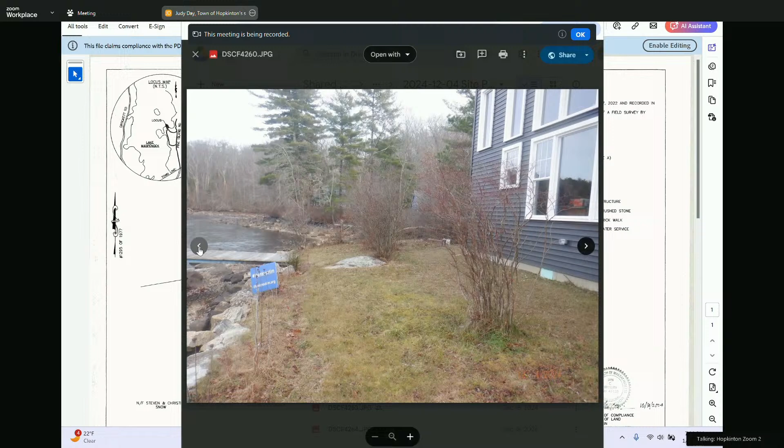Okay, no major concerns. So in your opinion, the additional plantings would likely be what the commission has approved in the past for tree replacement? Yeah, I didn't count the number of plants, but there's probably at least 10 shrubs. Okay, yeah, okay.

Does anyone on the commission have any questions or comments on this? It seems straightforward to me, looks pretty stable here. Anyone from the public have any questions or comments on this application?

Melissa: I was slow to unmute myself. I just have a question for you and Matt, I think. Are you worried about the roof runoff and drains around the house? I think, Joe, were you saying that you saw roof drains? I did not see roof drains.

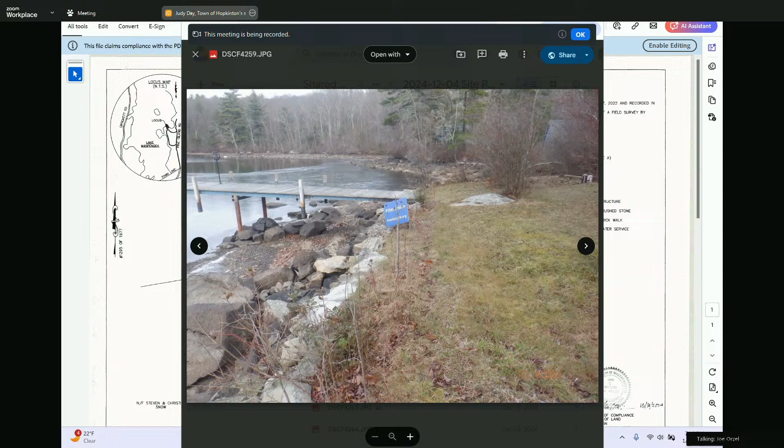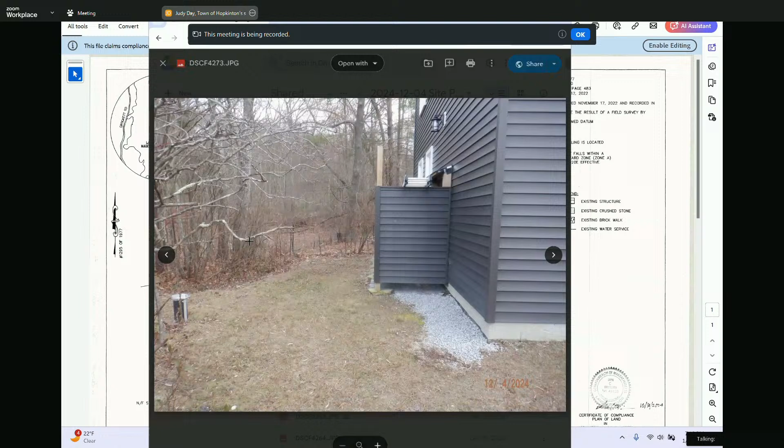So I don't know what was put in as far as foundation drain. I think the condition noted foundation drains were to be installed and perforated beyond a certain distance from the house. So there's no way of knowing that, but it wasn't observed during construction. But the crushed stone around the drip line kind of indicates there may be drainage under that crushed stone to pick up the runoff from the roof.

And there's no, do you have any gutters? No downspouts, there's no downspouts, no gutters. Okay. I think my thought would be that the crushed stone around the edge, with it just running off the roof and having time to infiltrate there, would be okay in my opinion.

Okay, and I guess the other thing would be the couple of items noted on the engineer statement regarding a few things done that were not on the approved plan. The shower you're looking at, that existing shower, was not on the approved plan. The crushed stone apron we're just talking about, stepping stone walkway, a landing, and another step in the walkway along the house. I think they're all within the limit of work of the proposed project.

Okay. I think I'm okay with this one. Okay.

If there's no other comments, can I get a motion to close out and approve this certificate of compliance and get signatures from Anna or Judy? So moved, second. All right, all in favor: Ed, aye. Jim, aye. Ted, aye. Matt, aye. And I am also an aye. All right, that's all set.

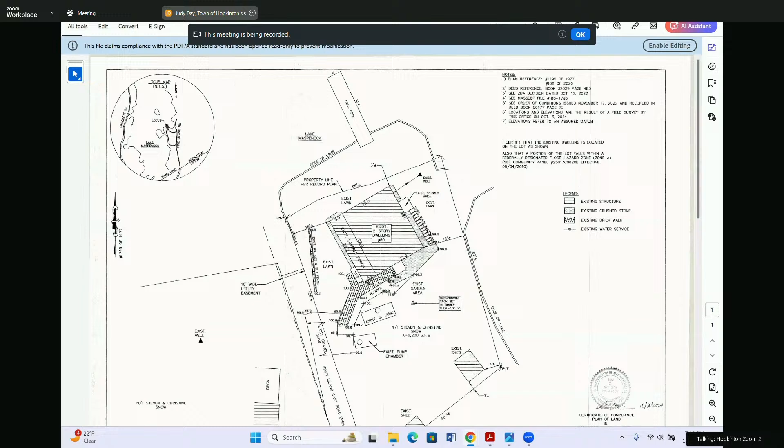All right, so what are we at? 7:12. If we have those on the line for the townwide vegetation management plan, I think we could probably go to that new hearing. And this is one I need to read. Grab my page.

All right. Hopkinton Conservation Commission will hold a public hearing on Tuesday, January 7th, 2025 at 7 p.m. virtually online to hear all persons interested in a request for determination of applicability filed by Hopkinton DPW for a vegetation management plan. Location is townwide easements and right-of-ways.

Do we have someone on the call? Carrie, I see Carrie. Yep. So I'm here with Carrie Reed, Director of Public Works, and I have with me Stephanie. Hi, Stephanie Hansen with CEI. So I'm just going to do a quick intro, and then I'm going to turn it over to Stephanie to go over the technical piece of it.

So this is for a vegetative management plan for right-of-ways in town. And the biggest question we've been getting is why, why do we need this? The Department of Public Works is responsible for maintaining all the roads, sidewalks, bike lanes. This will help us improve and give us another tool for maintaining those areas, for safety, for aesthetics, for operations and maintenance, and all that we're required to do. And then the other question is, why now? We've never had this before. Why do we need it now?

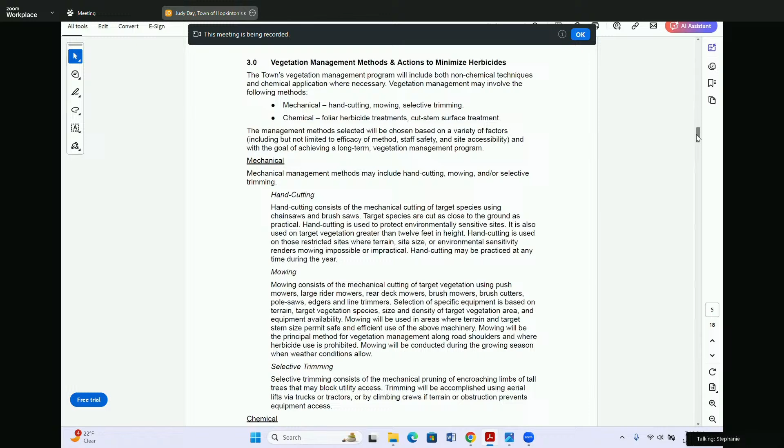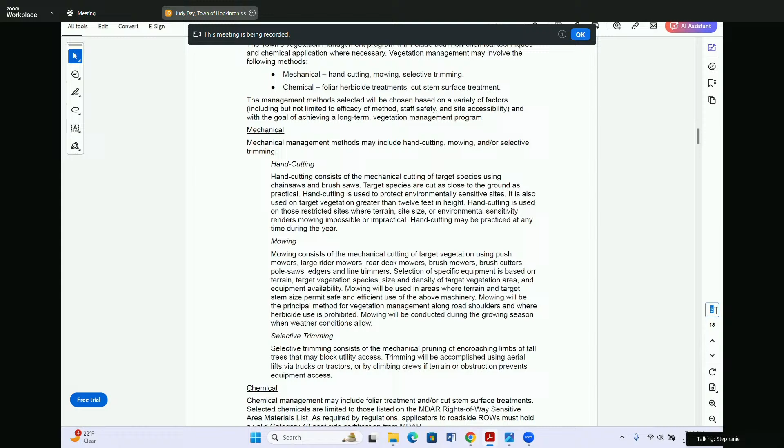The plans also provide guidelines for weather conditions during application. There's a remedial plan in there to address any type of spill. There's a monitoring plan and a daily log. And it also gets into applicator qualifications.

So for example, whether the applicator is town staff or a contractor, they need to pass a core license exam through MDAR. They need to work for several years under that core license, and then they need to pass an additional exam, which is their Category 40 right-of-way exam. And that allows them to then oversee any type of herbicide application.

This right-of-way program limits herbicides allowed regardless of labeled use. I know the town has a number of schools and daycares with IPM programs that have been approved by MDAR. This is a completely separate program. I'm actually not that familiar with it, although I did look through a couple of the plans for the schools, and the herbicides that I saw listed on there are actually not allowed for use within right-of-ways by MDAR. MDAR has a very small list of herbicides that are allowed to be used in the right-of-way.

Currently, both the VMP and the YOP are within a 45-day public comment period. Written comments for the VMP are due by January 24th, and written comments for the YOP are due on February 7th. Both of these have been published in the statewide environmental monitor, and that starts the 45-day comment period.

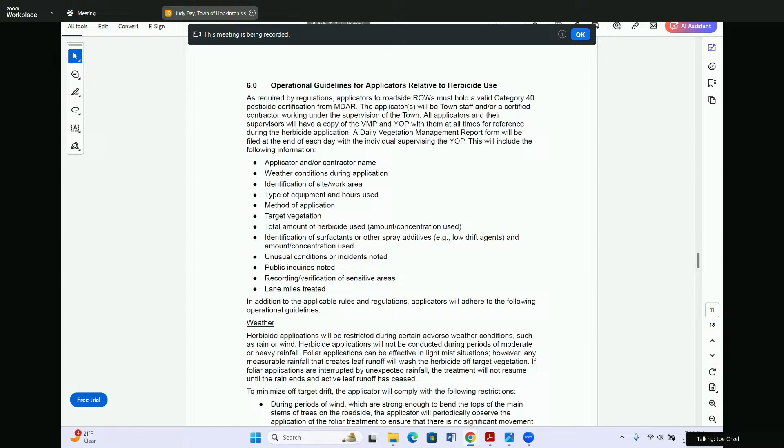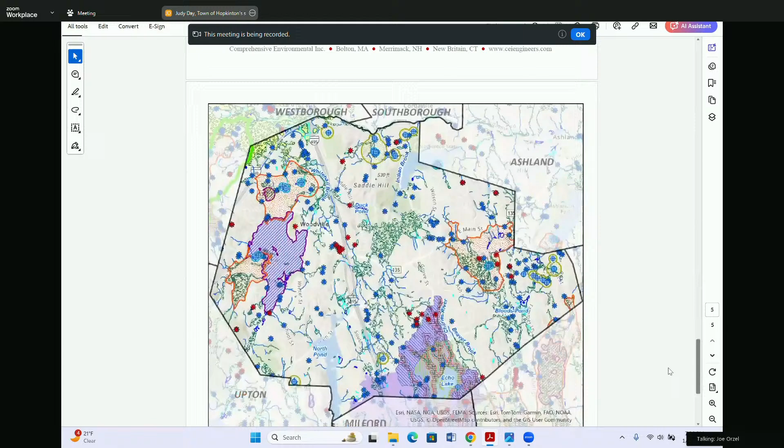I did have a couple of comments. I think I did have a chance to review the responses today, and I think the comments were pretty well addressed. I had pointed out just on the map that was provided, I thought there were a few things that were missing that should have been added, and those included potential vernal pools, the outstanding resource water data layer from Mass GIS, and also it looked like some of the DEP mapped wetlands were not on the original map.

And it looks like all those items have been added to the map, just to make it a little clearer where potential resource areas or potential sensitive areas may be in an area that they're going to be proposing to work.

I also just noted that the Wetlands Protection Act exemption referenced in the application is for work in buffer zones. If any work was proposed in a resource area, that exemption would not apply, but there is another exemption in the WPA for this type of work within the resource area, only if it meets certain conditions.

I would imagine if that was the case, they would come before the commission to get that clarified. As was noted, the vegetation management plan is now being reviewed, I think it's in the hands of the Department of Agricultural Resources, and I believe the only thing needed for the WPA regulation is a determination of applicability from the Conservation Commission.

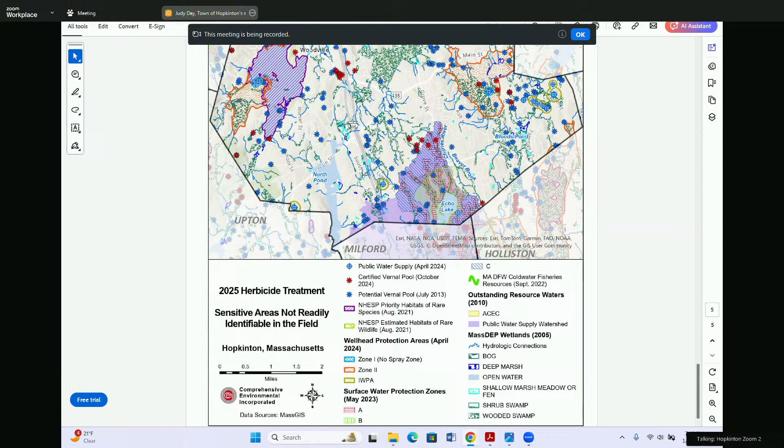There we go. Thank you. All right. And we have, really quick, Judy, 9 Chamberlain continued, but I should still open it and read it, correct? Kill it? Right, yes please. Make it go away.

The Hopkinton Conservation Commission will hold a public hearing on Tuesday, January 7th, 2025 at 7 p.m. virtually online to hear all persons interested in a notice of intent filed by Alex and Lilia Flores to construct an addition and an in-ground pool with associated site work. Location 9 Chamberlain Street, Assessor's Map U23, Block 11, Lot 0, and 0 Chamberlain Street, Assessor's Map U23, Block 12, Lot 0.

Can I get a motion to continue this to the next hearing, January 28th? So moved. Second. All in favor? Ed, aye. Jim, aye. Ted, aye. Matt, aye. And I am also an aye.

Moving along to Heritage Properties, the trails at Legacy Farms, request for additional units to be released from the cease and desist. This is a continuation. So do we have Mr. Bemis, Mr. Gately on the call? I believe so. Yeah, I'm here, and Mr. Gately, I believe, was going to attend. Okay, oh yeah, I see him. Here I am.

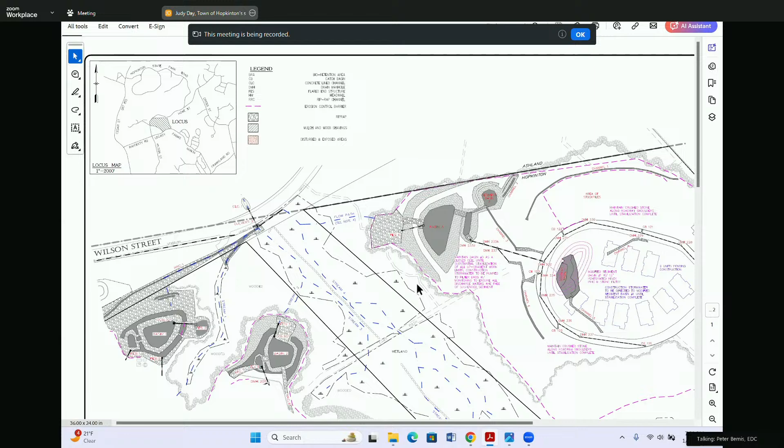The 11th unit would actually be in the basin, so that wouldn't be constructed. That's unit 43, until all the other work was done. This is in the center island, if you will, of Waterville Lane. So we showed the units where they're positioned, and then the basin. That basin's been constructed. I did provide a picture of it. There's no channels leading into it yet because nothing's started until you approve it. But we would bring a stone channel into the basin for the units. I would suspect I'd have one on the east side and one on the west side, probably for the units.

Just to bring water down from the construction limits to the basin. We were going to perforate. We did put a riser pipe in. We were going to perforate that and put stone around it. We actually have already put this basin into effect. We had a rainstorm which had pretty good volume, and the basin infiltrated within that zone. So we're going to leave it and monitor it and see how it goes. I'd rather infiltrate as much water as I can here versus having it run off.

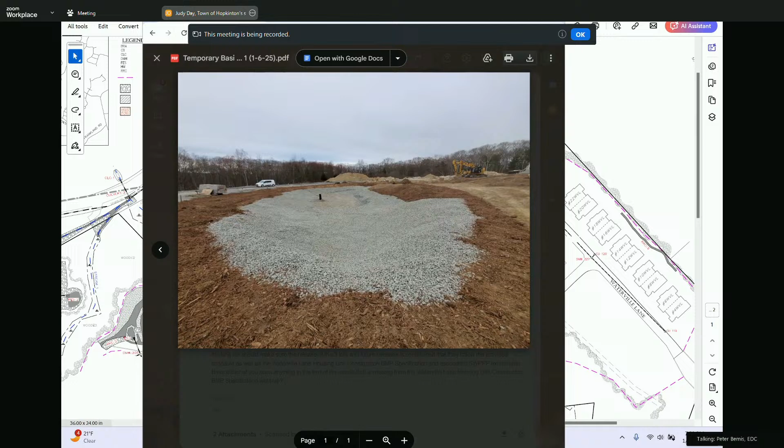That pipe would overflow its top if it was to be an excessive storm, so we do have the ability to manage this if we get a real heavy storm. But I have to say the capacity of that basin is pretty large, much larger than the water that should be generated in this island of land that we're now going to disturb. So we're trying to put things in the right direction here, and this is all stabilized within the basin limits.

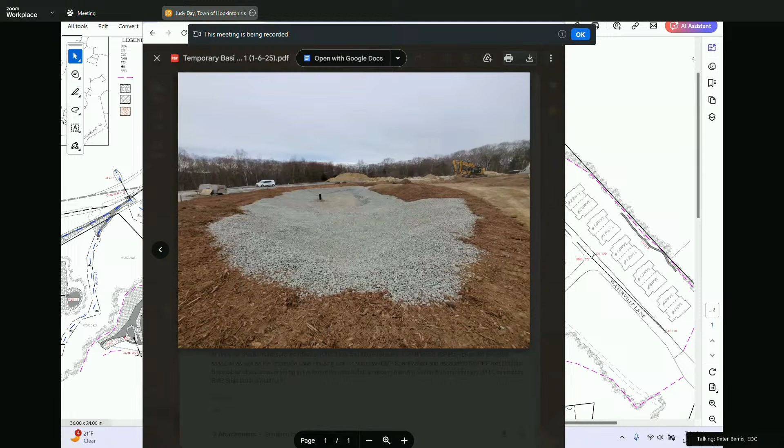And the last thing that we provided you with was a construction schedule that was updated to outline the 3 units we're asking you for this evening. We would anticipate a construction start on those in the next 3 weeks. And then we would be finishing our sewer pump station, that's probably about a week and a half out. We've got some gas mains going in, also about a week and a half out. And then we would be back to you in mid-February for the next release, if we can get those 3 foundations underway as we expect.

Okay, that's all within the same island. And then there'll be a future request sometime in April for 4 more units. And by April, we would expect to have the ability to start stabilizing some of these areas permanently.

Thank you for providing that detail. And I believe you got all the SWPPP reports in. You said that in that last rainstorm there weren't any silty discharges coming from the site. Correct, looked good. Basin 3 is shut off again - like I said, we should have done that for that previous storm, but it wasn't done, so it is now.

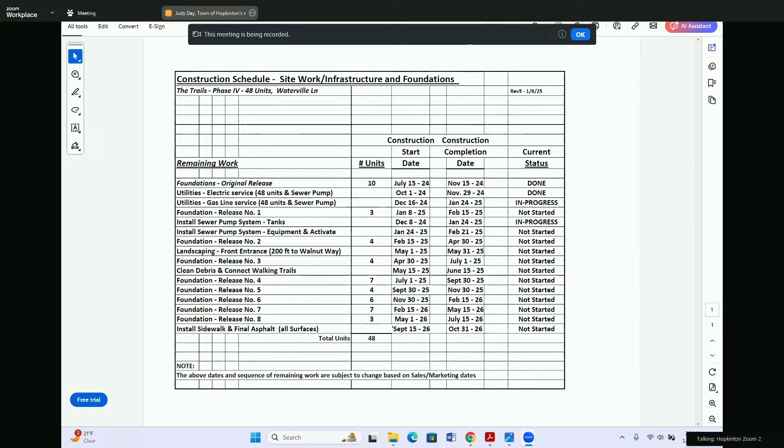Judy, can you just put up the BMP sequence schedule? What are we calling this, construction specification? So I was reading through this, and I think this construction specification and the level of detail here is really great, and is kind of what I was thinking of as far as scheduling and making sure these things were in place when foundations were done - putting down stump grindings and stone and things like this.

So I think at this point in time, speaking for myself, I'm comfortable with releasing the next 3 lots, including the schedule. But in my mind, the schedule incorporates this BMP specification. Those 2 documents kind of work together and live together as far as sequencing and scheduling of how these lots are constructed and brought online before you go to a next phase.

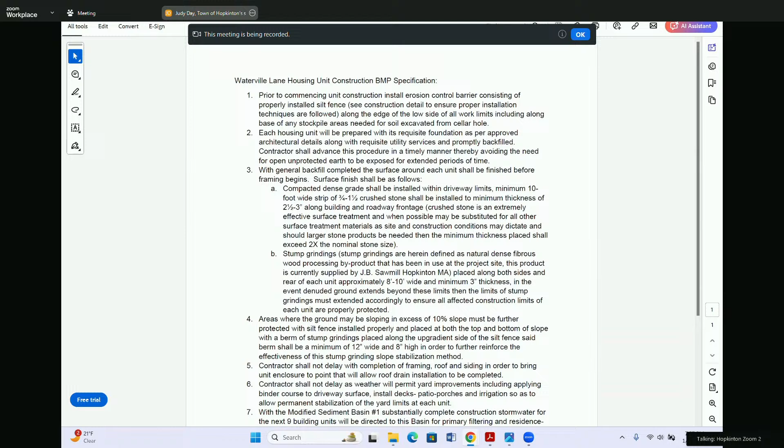My thought would be we could release these lots on the condition that the schedule is followed, including these construction BMP specifications as part of that scheduling sequence. Does anyone on the commission have anything they want to add or comment on here?

I can speak to that. We had a hearing back December 23rd, roughly a week or so after the last hearing with this board. And at that meeting on the 23rd of December, they did release these same 3 units we're talking about here, and of course their approval was conditioned on getting the same approval by this commission tonight.

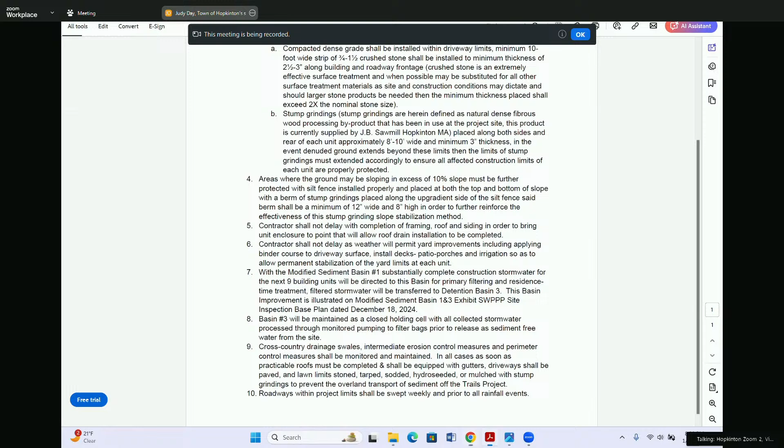All right, next up we have Toll Brothers, Elmwood Farms 3, Newberry Glen violation discussion. Hannah and Judy, do you want to give some background on this one? Sure.

So Hannah and I, on December 30th, observed sediment beyond the limit of work originating from the Elmwood Farms 3 development. We observed the sediment in the 2 off-site stormwater basins on Blueberry. And then walking up onto the development, saw sediment-laden water pooling around one of the catch basins towards the middle of Fitch. Let me see if I can pull my pictures up. So the basins were silted out.

The contractors had placed a sort of temporary barrier at the outlet of the first basin to try to limit some of that water flowing out. But since the hole where the pipe is in the outlet has gaps around it, it doesn't work super well, so water's still kind of flowing freely through there. This is the flooded area around the catch basin. There is a silt sack, but I think the silt is so fine that it's going through there.

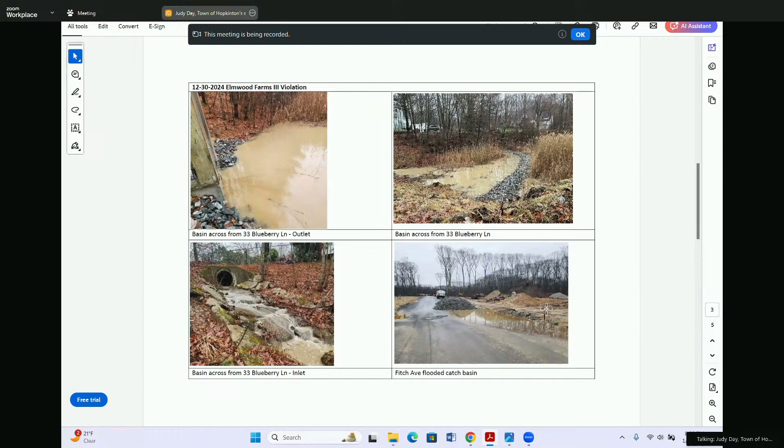We did meet Rich on the site, and they had a lot of the same thoughts on this pooling causing the downstream sedimentation. So they've since added wattle and silt fence 100 feet in both directions of this catch basin. We went out a couple days later after the New Year's Eve rain and didn't see any of this pooling. The basins were still super silty, but the water coming into them was clear at that point.

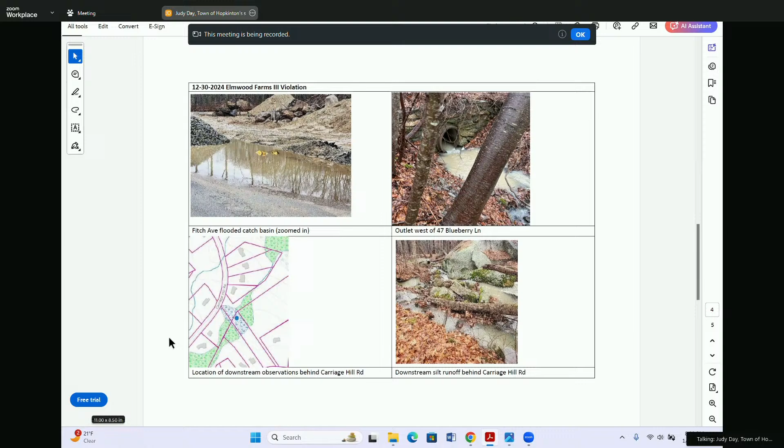But we did walk about a mile downstream and observed sediment beyond what we would consider the stormwater system, past the basins, all the way back through under Ash Street and then behind Carriage Hill Road for about a mile. All still silty through last Thursday.

I believe Rich and Ted were planning some other mitigation besides the wattle and the silt fence. I think they added floc logs to some of the catch basins and are considering a temp basin as well, but I believe they're on the call if they want to speak to some of those additional improvements.

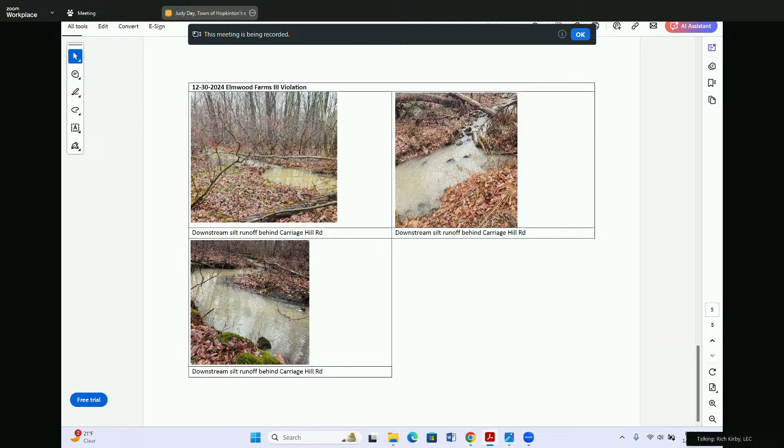Thanks, Judy. Rich Kirby from LEC here, and of course, Ted Merchant's on the line. If I could share my screen, I could overview with the commission the materials that we had provided to you.

I was on the site the morning of the 30th when Judy and Abby showed up, and I was on the phone with Ted talking about how we can better address the runoff. If the commission recalls, we had installed silt fence and compost socks along the edge of the pavement here, increased the diversion swale, and did some other things as a result of the prior rain where we had about 2 inches of rain.

This is about a 1-inch storm. And we thought we had it covered, but there's a slight low point in the pavement here with these two catch basins where water was ponding. So later that day, I put together a correction plan, and it was implemented later that day and on December 31st.

And this is the results of what we had done. So basically we added floc logs to the catch basins in this area here. We installed the compost sock and silt fence along the pavement edge and cleaned up the sediment on the pavement, to capture any runoff coming off the hillside in this area.

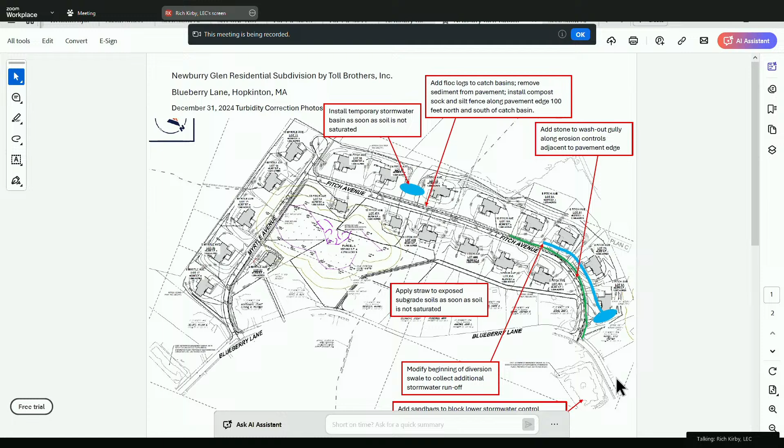So some photographs to show you what that means. Here's where the pavement was cleaned up. For reference, you can see the pile of stone near the pavement right there. This is where the water was coming off the hillside and entering into the pavement and ponding in this low spot, where there's a catch basin here and another one across the street.

The silt fence and compost socks were installed as the street rounds to the north and intercept Blueberry Lane. Stone check dams were installed intermittently to again slow the water and try to capture some sediment.

And this is the off-site basin on the 31st, and they blocked off this orifice with sandbags and plywood, so the water level could rise up and it could contain and retain more stormwater on the site. You can see the stormwater cleared out pretty quickly after the rain stopped.

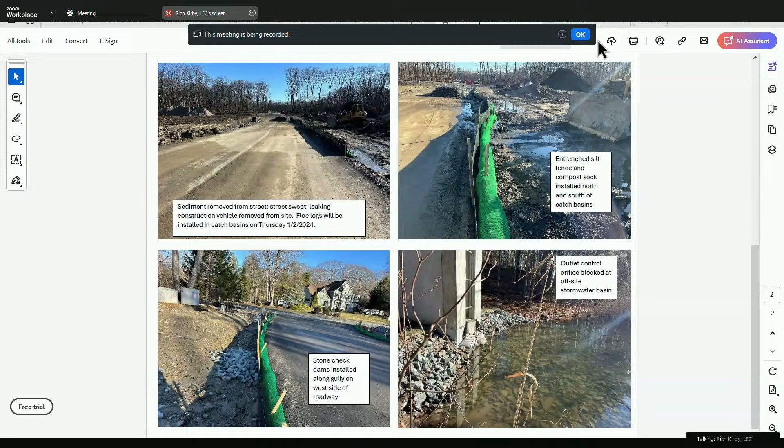Can everybody see the plan now? This is the plan that's put together showing areas where seed, straw, tackifier, and flocculant were added. The green areas are indicative of areas that have been completed. The yellow areas are scheduled.

Hydroseeding is sort of a balancing act between having frozen ground conditions where the equipment can drive over the land to access these areas to spray, but it being warm enough so that they can actually spray it and that the water doesn't freeze so they're able to actually implement it.

So far, the slope over by the stormwater basin, the offsite stormwater basin, has been sprayed and stabilized. These two lots have been sprayed and stabilized along with the roadway shoulder. These two lots are under construction or will be excavated next week. So we've got the roadway edge here and this area adjacent to the loam pile. This is where the two catch basins are.

And then the opposite end, the southern end, you can see what we were able to spray along the roadway edge here, and then more will be provided in this area.

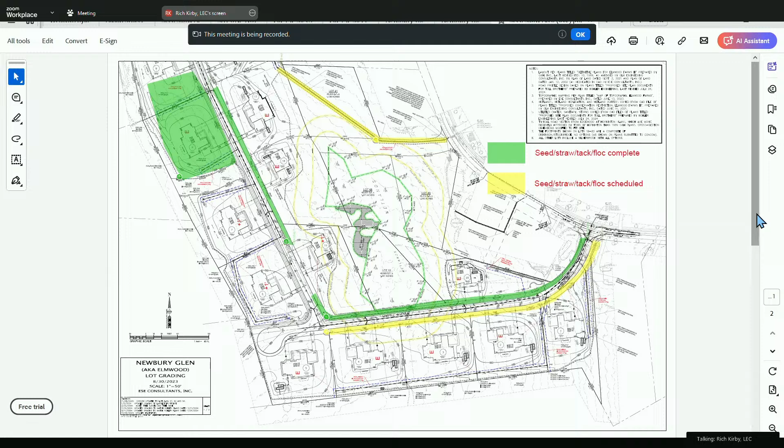So that'll give an opportunity for us to further stabilize the site. And of course, the plan going forward is as additional lots are opened up and the topsoil is stripped and stockpiled, those would also be sprayed with the same mixture of seed, straw, tackifier, and flocculant. So we are more confident now with this plan and the things we've implemented thus far, based on what we saw after the roughly 1 inch of rain that prompted the violation.

And if I can just chime in, I'd like to say that we realize the evidence and some of the pictures that Judy showed are not acceptable, and we're committed to correcting those issues. We'll work as much as we need to get it complete. We realize that's not what the town wants to see, certainly not what we want to see, and we'll work until we get it right.

Okay. Thank you. Appreciate that and share that sentiment for sure. Appreciate the efforts. I know that...

So there were two rain events. One caused the pictures that were shown, I believe, and then there was another day of rain, maybe after you had installed some of these measures, and I think it did improve. There was still sediment making its way downstream, but as Judy had said, coming off the site it was cleaner, or it was clean. So I appreciate and thank you for taking care of that, because it seems like you did, as evidence of that second rain event, take care of what was coming off of your site. So I think that's very appreciated and positive.

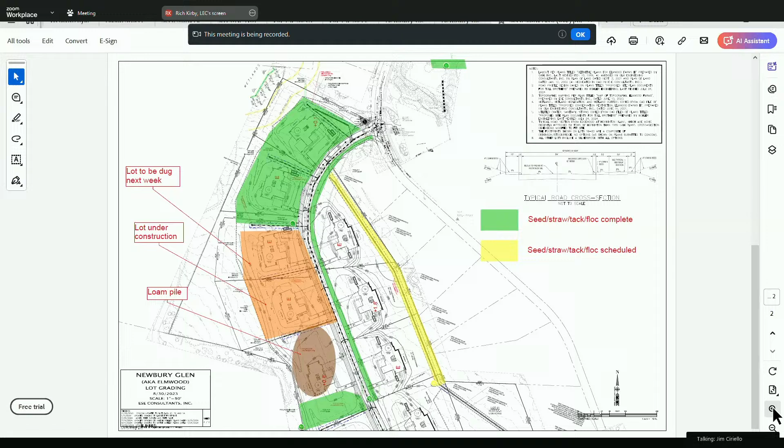And not stabilized in any other way. And then also, I can't really see on the plan that I'm looking at, but can you give me what's the elevation difference between the top of foundation and the existing grade, roughly? Oh boy, I'm not sure that information's on this plan, but we can look. Oh yeah, actually it is. I mean, we're talking a foot, or we're talking 10 feet? Well, there's only one foundation in the ground, and that foundation hasn't been backfilled yet. So, in a finished condition, that's maybe a foot or a 2 foot difference.

I guess what I'm thinking about is that excavation of that parcel without knowing how things are going to take place in a significant storm event. The houses on the right side, the ones that have developed, you said that you've left what in place? The native, the original vegetation? So those haven't been grubbed or what? So they've been grubbed, but the loam has not been stripped off of those lots. Okay, but on the one scheduled to be excavated, it has been. Correct. The ones on the left-hand side were cut lots, and the ones on the right-hand side were fill lots.

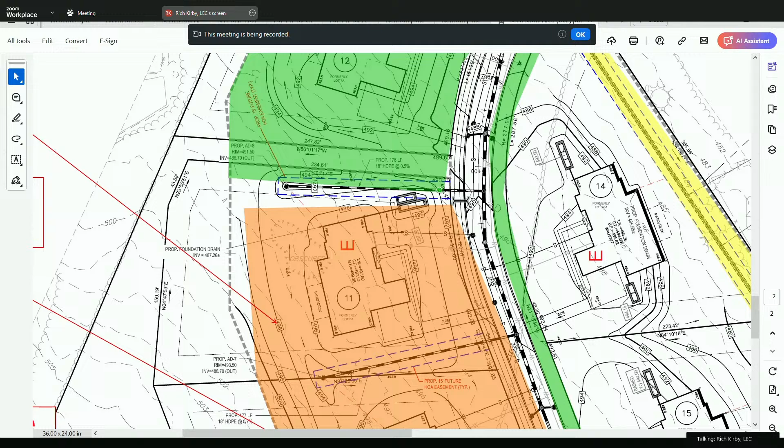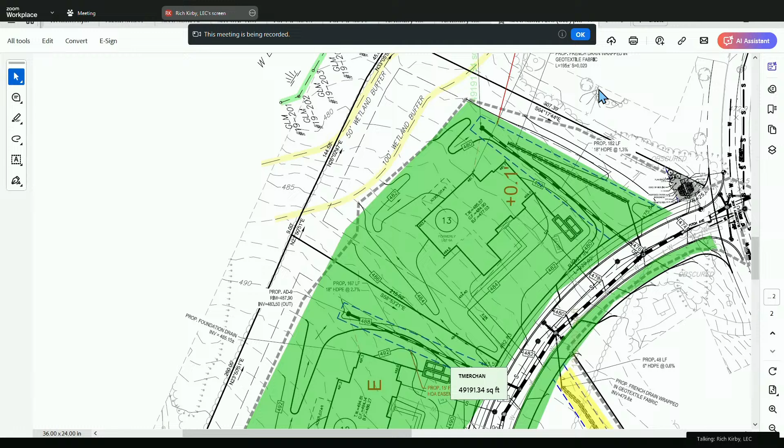And the grades have a tendency to push runoff toward the street and to the north. Yeah, so we have good sediment control on this side of the pavement now. And I have some photographs of what this area looks like here, just as an example. Okay, if you'd like to see them, I'll stop share and reshare.

Let's try this. I'm on a network, so things are a little slow here. I'm just getting the hourglass waiting for the photo to... Judy, you don't have those photos, do you? No, I don't believe so. My most recent pictures are from the second. Okay.

Just bear with me. Yeah, these are 10 and 12 megabyte photos, and I'm on a network, so it's struggling to open them up. But it's a significant amount of material that's on the ground. It's not just a sprinkling of straw. It's a significant amount.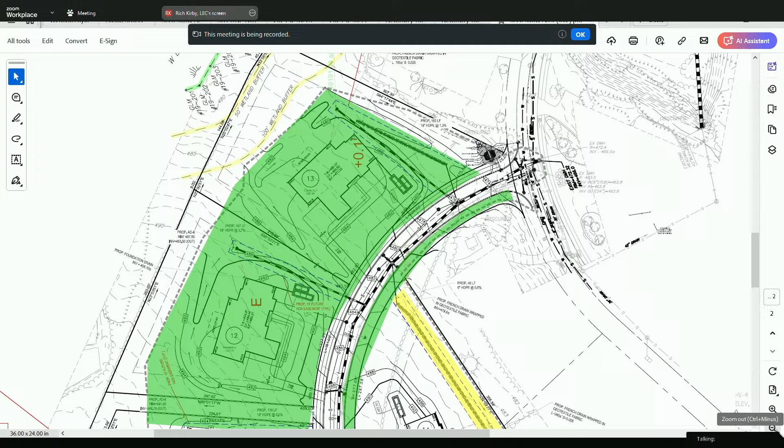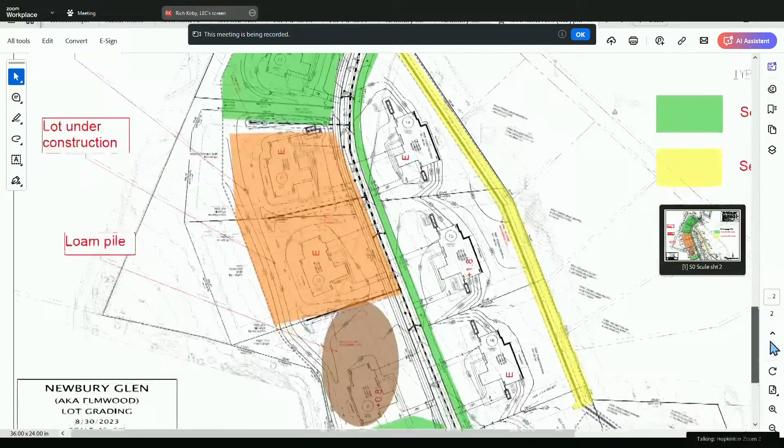Yeah, so thanks for bringing those up, Rich, the pictures. As we mentioned, I think the commission is not opposed to, doesn't have any hesitation with working with the building department on foundation permits and limiting those if sites are out of compliance or having repeat issues. So obviously we take it really seriously. You guys know that.

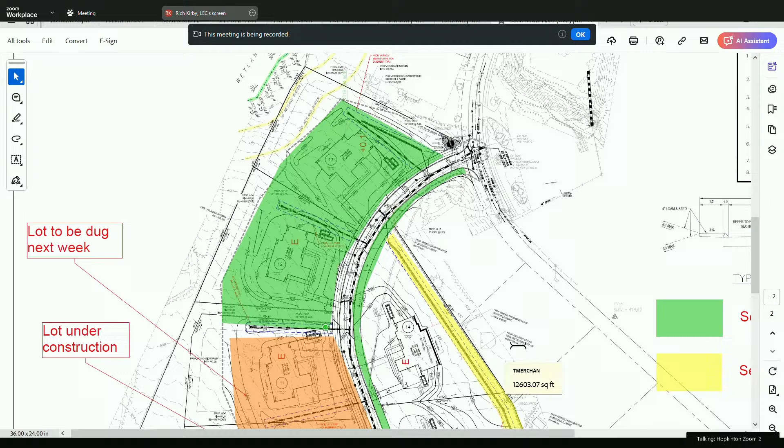I do feel like there was a significant effort put forth here to stabilize the site at this point. So, I think I'm feeling comfortable.

I just, again, would reiterate what Jim said about being proactive with those basins, the sediment in there getting resuspended. So regardless of how tight your site is, just really paying attention to the weather, those basins, and taking care of that sediment, working with the staff to proactively manage what's already made its way off your site.

Because I think as a commission, that would be the next thing in my mind beyond your site that we'd have to start talking about, you know, enforcement action by the commission. And that would consist of holding up building foundations going forward.

Yeah, and with the sediment being so fine, a little goes a long way in terms of those photographs, literally and figuratively, right? A little goes a long way, but in terms of making the water appear as cloudy as it looks, but also, of course, staying suspended for a good distance. Oftentimes, with coarser material, you'll have measurable sediment deposition within a stream channel or within a wetland. I don't think that's the case here. It's just that we have turbid water flowing off the site.

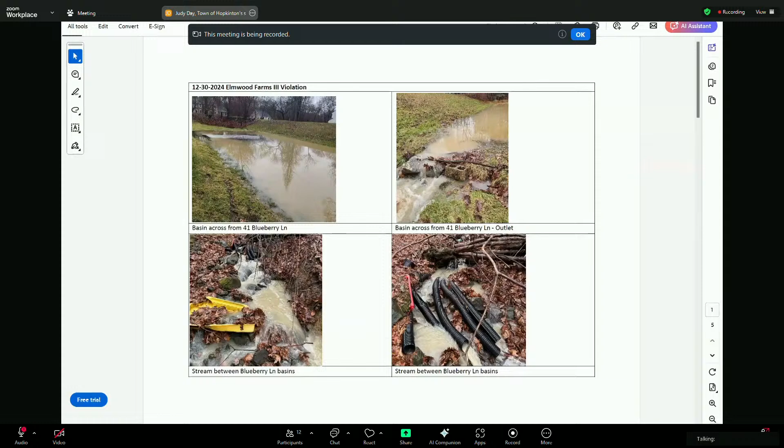Next up on the agenda, we have the 2024 Draft Commission Annual Report and Goals discussion. Anna or Judy, did you want to go through just a brief overview of what you drafted up?

Through the chair, may I interrupt really quickly? Yes, is your cleaning guy knocking? I am getting the signal, but I did read through this draft, and Anna and Judy, I don't know who is the primary author, but I thought it was fantastic, and I thank you for your work. Thanks, Ted. But I gotta go. Okay, I'm coming. See you next time, everybody. Sorry I had to skip out early. It's okay, thanks Ted.

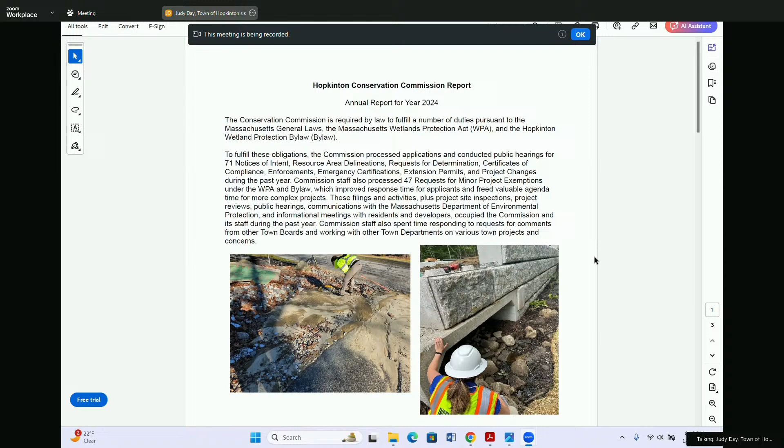Y'all can mostly thank probably Kim, I recycled a lot of this, some small tweaks though. So, have an overview of work that the ConCom did this year: numbers of applications processed, minor project exemptions, work that staff did working with other boards and town departments, some pictures of Anna looking at silt from Elmwood Farms.

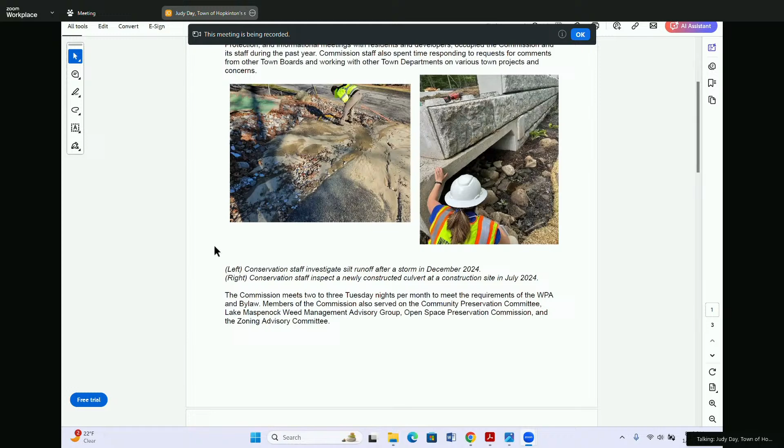This is Kim looking at the culvert by Whisper Way. Information on how often we meet, other boards that y'all serve on, major projects reviewed this year, turkeys from Turkey Ridge.

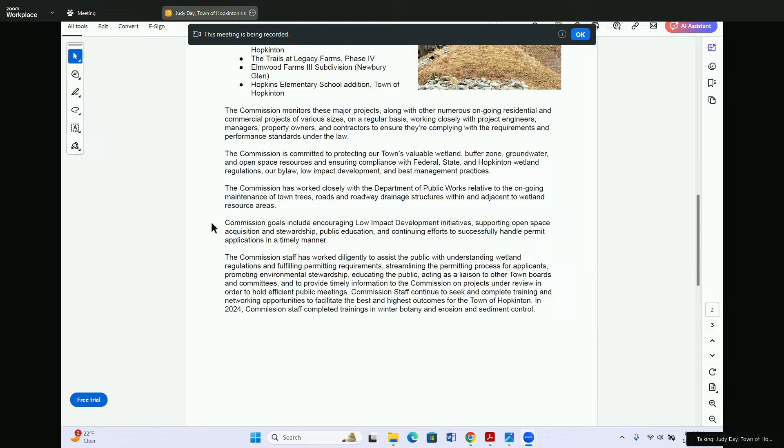Just kind of basics on the scope of the commission, resources we protect, work with DPW, a paragraph on general goals, since I don't believe there was a goal setting initiative for 2024. So we can swap these out as we update and have new ideas for goals.

This is some information on trainings that staff and commission members have done. Got some pictures of wetland replications at Whisper Way, updates on Jeffrey Barnes leaving, Melissa becoming the new chair, welcoming Heather, thanking Kim and welcoming myself, and then links to more information. So kind of broad brush what we do, what we focused on this year. If anybody has any suggestions, definitely happy to hear them.

No, I thought it looks really good. I like the pictures you put in there of the wetland replication area, like the before and after. I think that's really cool.

No, I think it looks pretty good. One thing just for the others on the call: I talked to Anna and Judy about as far as 2025 goals, just working on those over the next month or two to establish them, and then those would be recorded in next year's annual report. If we establish the things we've been talking about, public education and working on a couple things over the years, so we still want to do that, but just not putting it in this because it's the 2024 report versus what we'd be looking at in the upcoming year, if that makes sense.

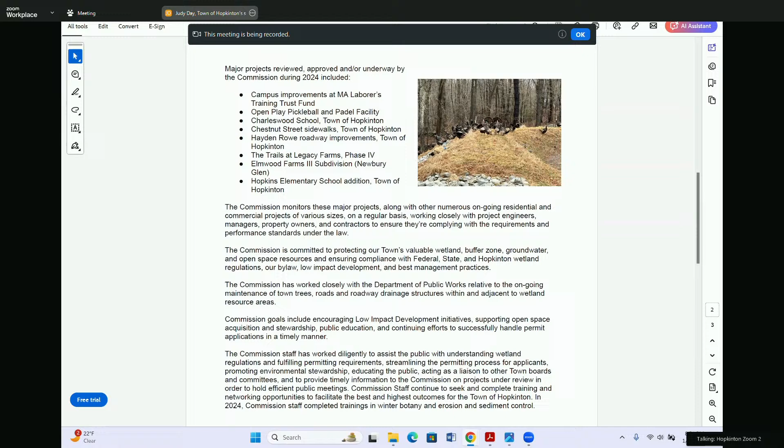Delegate, Ed, that's my advice to you. Yeah, no, you guys did a great job. Thank you, appreciate it. All right, yeah, so I guess if anybody has any comments on that or thinks of anything else, maybe by the end of next week is a good time frame.

Any public forum requests? I don't think so, right? Okay. And I think it's the January 28th meeting. I think Heather had emailed me that she's going to be out of town for that one. Correct, yeah, that's what I have. So I don't know if anybody else has any conflicts, but that's all I have on my radar right now.

One quick thing we may want to look into ahead of the 28th - I believe under the regular Wetlands Protection Act, an RDA determination is only valid for 3 years. So something we may want to just confirm one way or the other ahead of next meeting's discussions, in relation to the vegetation plan and how they were kind of automatically assuming it would be 5.

Yeah, yeah, she referenced an exemption, which we can look at. And I know that there is certain ones for like for orders for 5 years versus the 3, but you're right, I don't know off the top of my head for RDAs. The exemption I'm familiar with for the right of way has to do with the resource areas. There could be another one, but I think the exemption for a duration is tied to the resource areas and not necessarily the activities. But just worth maybe wrapping our heads around beforehand.